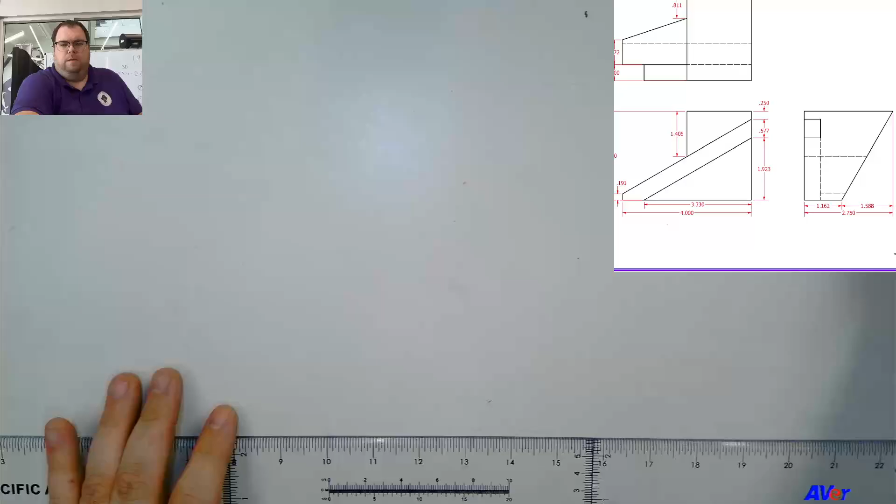All right, so we're gonna move on to the next unit here. Like I said last time we met, the next one is taking orthographic drawings, which you've been able to draw before, and figuring out how to turn them into isometric drawings. Now, we're going to change things up just a little bit when it comes to what Lab 26 is and what Lab 27 is. We're going to flip them around because 27 is much less complicated than 26.

Are we using tools? Can you say that again? Are we using tools for this one? Yeah.

That is not what I meant to do. Where's my mouse? There. Close. I need... oh my gosh, this having two cursors is driving me insane.

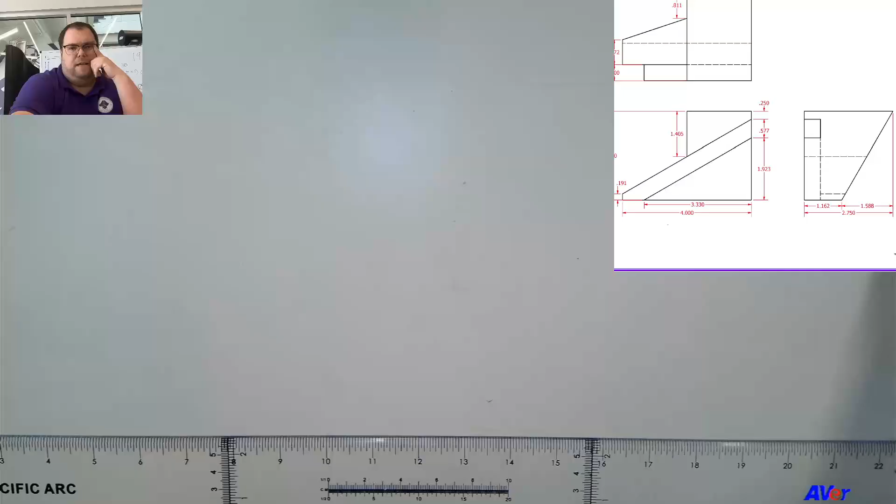Is it an easier process? Some people think it's easy, but here, let's just get into it and we'll see what you think. Basically, what's on the screen right now in the corner is 27. We're not going to do that one today. We'll look at that one probably tomorrow or the next time we meet.

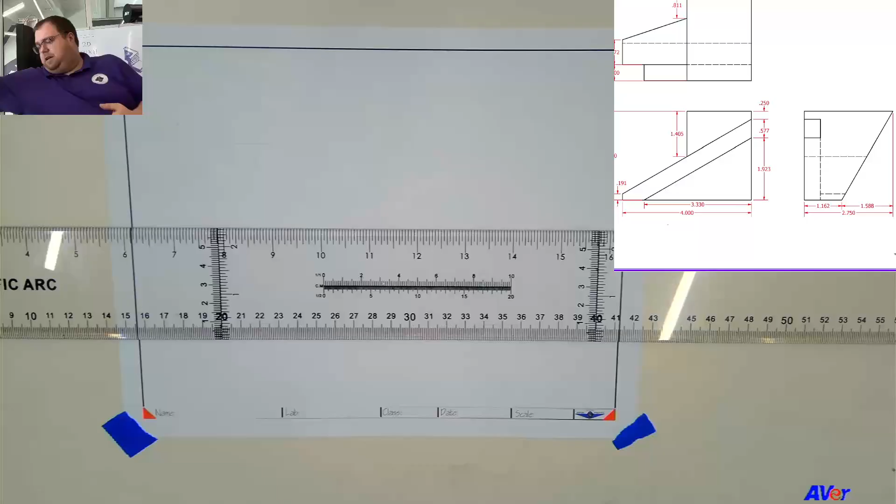It just has some weird hidden angles, and it doesn't lend itself to being put together from two-dimensional drawings super well. In fact, like I've told you, I'm in the process of re-editing this workbook as we go through the assignments this year. So I might even throw this one out or make it like a final test kind of thing, because it is fairly complicated to assemble because of the compounding angles. But let's just breeze past that for the time being.

And take a look at this one here. So this is, can I do that? Does that work? There we go. So this is the one that's supposed to be Lab 27. We're going to use it as Lab 26. So when it comes time to write the lab down, make sure you write 26 even though it says 27. Yes?

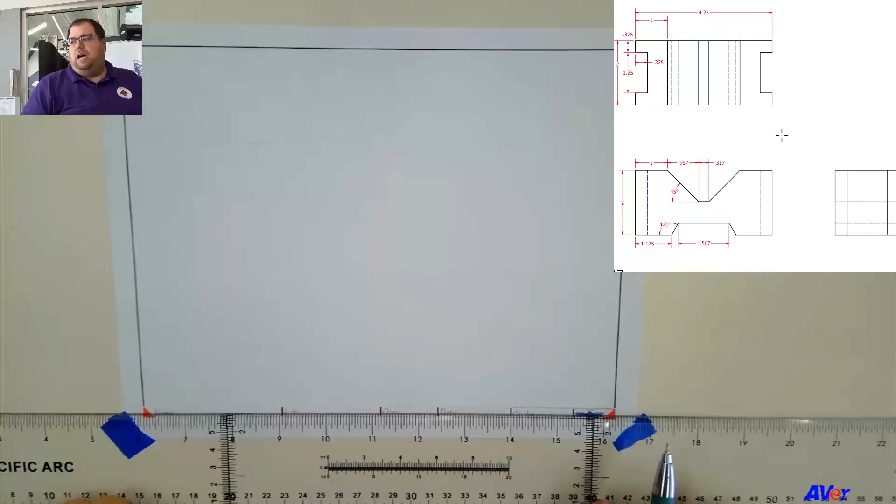So, alright. I'm working a little loosey-goosey today. I don't have a drafting board, so I'm just using the table. But we're going to start off by doing the three views for this, and then we'll put together its isometric view afterwards. This one is essentially a rectangle that has some pieces cut out of it. The shape itself is fairly similar to one that you've done before, but just different measurements. Now, one thing that is a little bit harder to grasp on this one, especially on the front view, is the dimensions are in decimals, so you have to do a little bit of converting.

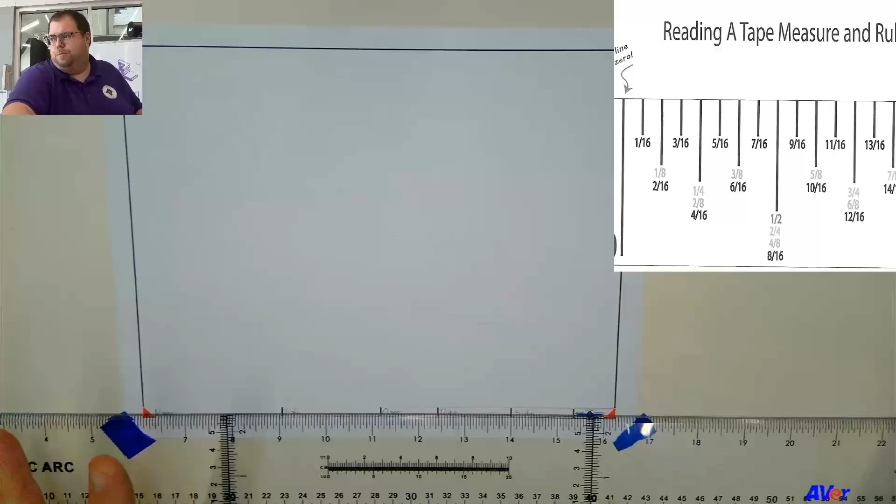However, in the back of your workbook, there is a conversion chart back here that'll basically give you the decimals as close fractions. There it is, the one in color. And if it doesn't have an exact match for those decimals, then whatever is closest is fully acceptable for this.

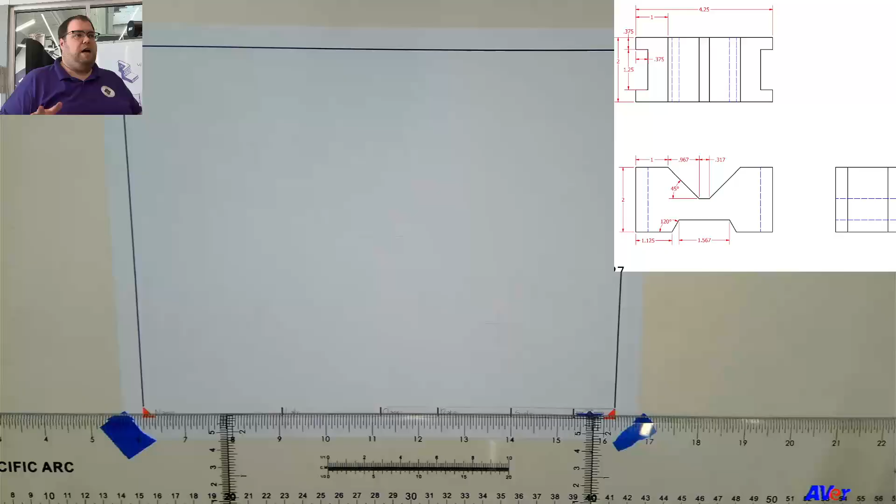What is the question? No, you're still using the same thing there. The thing is, our assignment is all in decimals today, so you have to do the conversion. So if you got the printed copy of your book, you can flip to that and keep it on the screen or however you want to check this out. There's also, I think, a link to that picture in Canvas somewhere.

But taking a look at this, first thing that we're going to notice is that our shape is 4 1/4 inches long, which means that we're going to put 2 1/8 at our center mark on here. Do some focusing here. And we'll pull this in a little ways. Let's see if we'll make that a little more centered. There we go. Boy, that's still not super sharp.

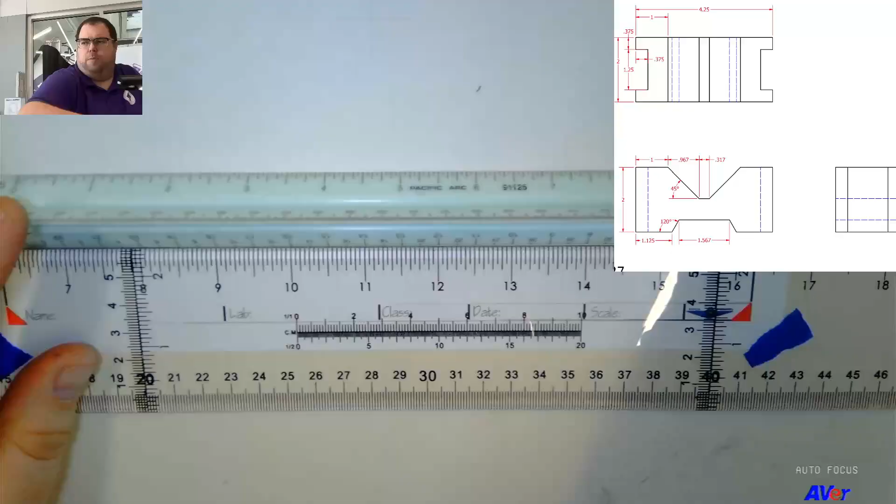There we go. Alright, so I have my 2 1/8 mark on the horizontal center, and the scale is on the vertical. I'm sorry, flip those around. 2 1/8 is on the vertical center, and the line is sitting on the horizontal. So I'm going to make a mark at 4 and a quarter, and a mark at 0. So those 2 dots there.

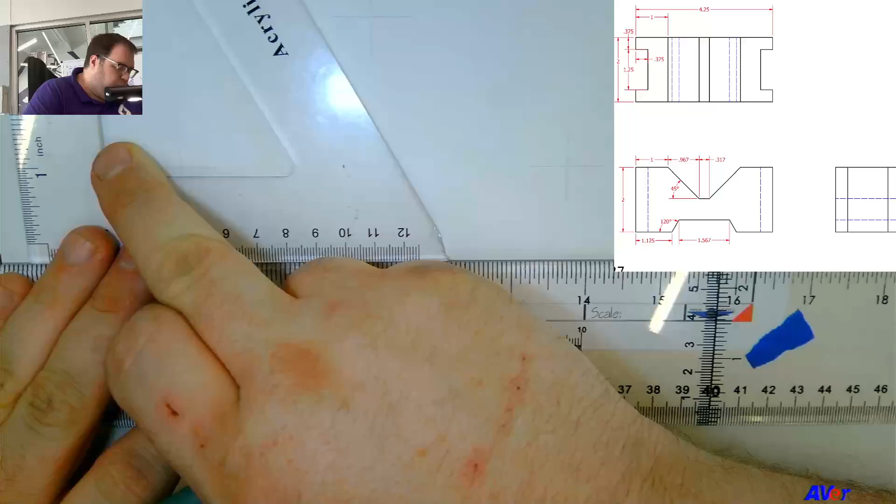Our shape is 2 inches tall. So I'm going to grab my triangle, set the 1 inch mark on my vertical center, and then draw a 2 inch line at each of my dots. So overall, this one should be fairly similar to what we've done before.

At the bottom, the line across from each side is 1.125, or 1 1/8. 1 1/8. 1.125. So that's in from the right, and I'm going to do the same thing in from the left. Yes. This? 2 inches. How long is it? 2 inches tall, okay. 1 1/8 wide. Same thing on both sides. Appreciate it.

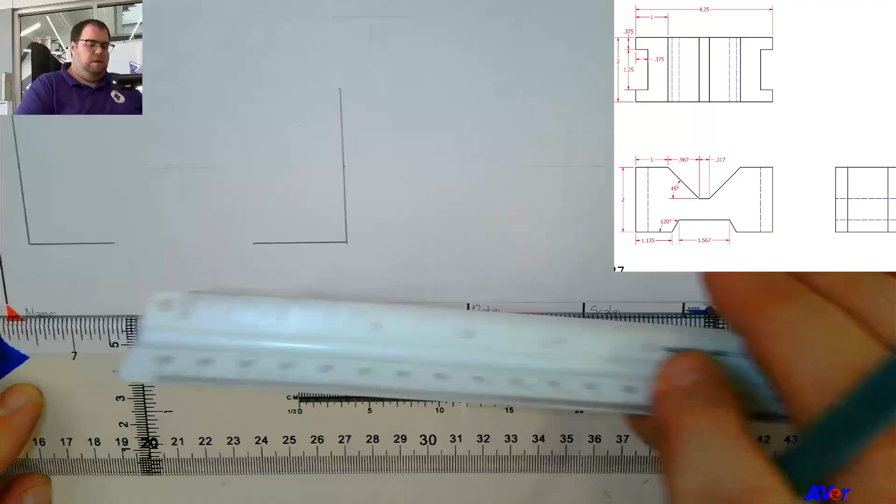Man, that was a bad idea. Why did I do that?

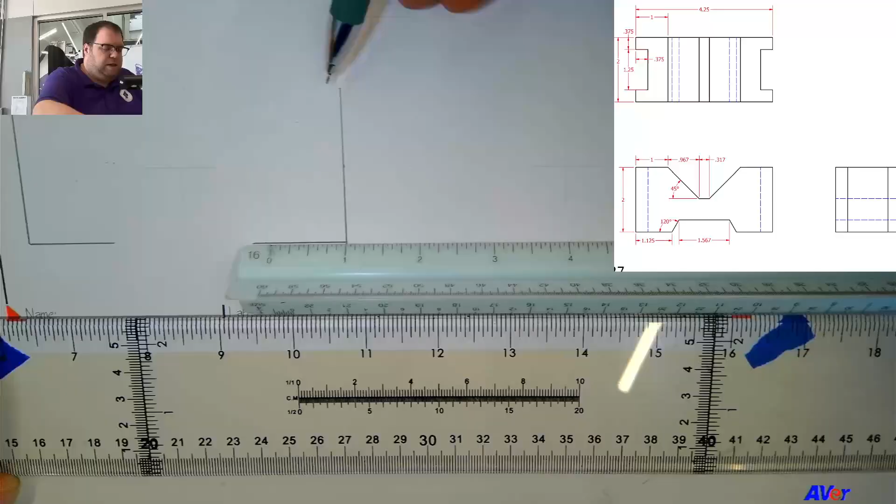Oh, nothing crazy other than I never fixed this from being a CAD drawing. I'll tell you what I'm talking about in a second. Up here at the top from each side is 1 inch in only. So there, and 1 inch there.

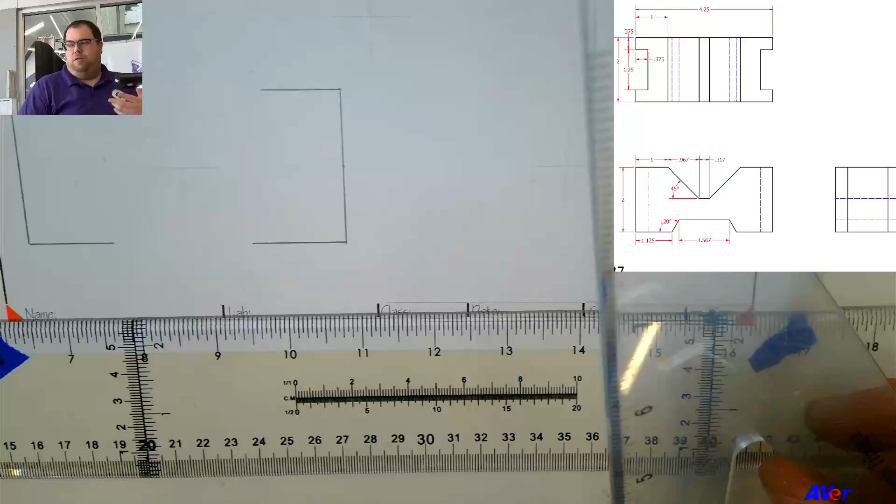So the thing that, and I'm pretty sure this is right, so if it's not right, we're going to go with it anyway. This cutout down here at the bottom, I gave you the width between the angles, but I didn't tell you how tall it was. I also gave you the angle. So it is possible to figure this out. It's super easy to figure this out if you're doing this in CAD. But since we're doing this manually, I should really have given you another measurement here, and that's what I'm going to do now.

So what I want you to do is, I have lined up the 1 inch mark on my measurement with the bottom line. I'm just going to slide over so that I'm in the center. And then I'm going to come up 3/8 of an inch and make a dot. So that's going to be the spot where that horizontal line is. I don't know how long it's going to be, but I do know it's going to at least be in between the opening down here at the bottom. So I have to do a little bit of scaffolding here.

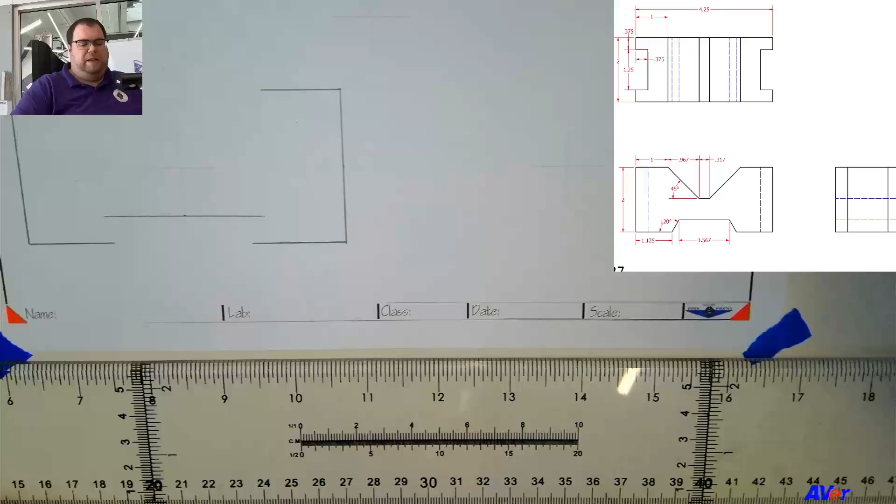How do you suppose we could use that angle? It says that it's 120 degrees, and it's 120 degrees off of the flat line here. If the flat line straight across is 180, and going straight up is 90, then 120 is going to be an additional 30 degrees. Or the 30 degree angle on your 30, 60, 90 triangle.

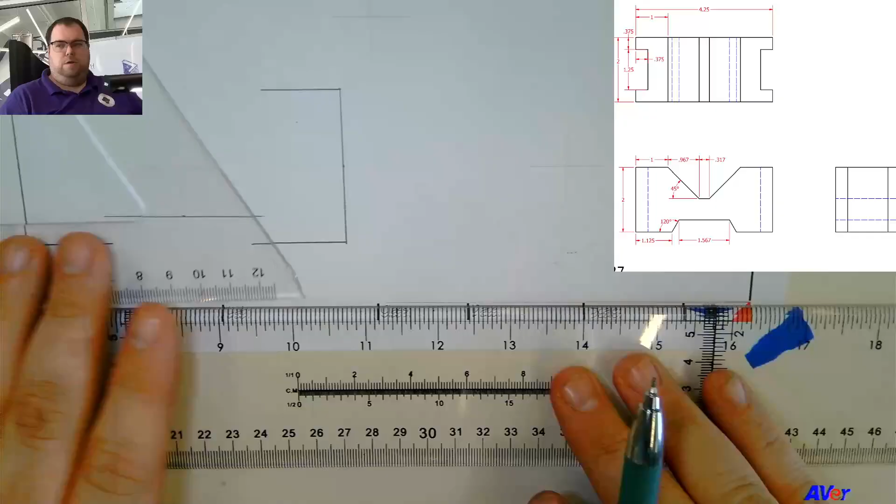So basically, once you have the line drawn there, 3/8 of an inch up from the bottom, we just need to set your 30, 60, 90 triangle so that the short leg is against your T-square, and then you just have to line it up with the end of the line on both sides. And then anything that's outside of that angle is something that we'll erase.

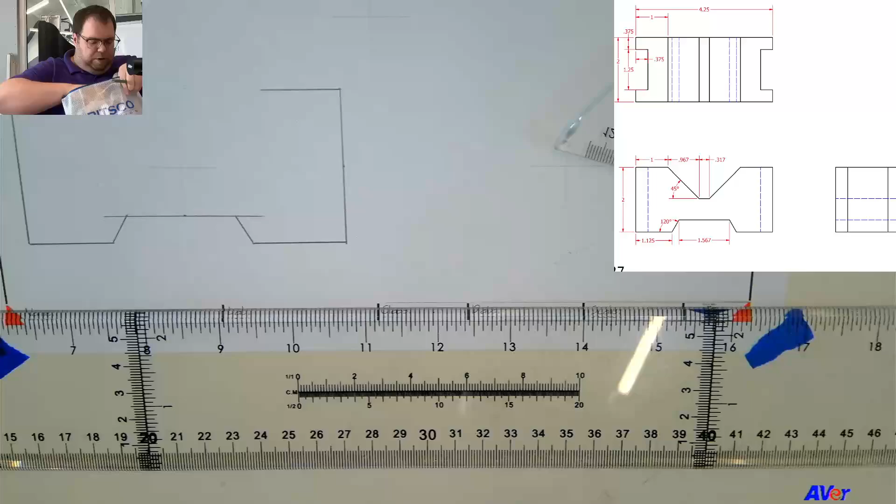The top, basically the same thing, except it is at 45 degrees, not 30, 60, 90. So I'm going to grab my 45-degree triangle, if it still exists. There it is. This one says 0.967 as the measurement. So we come down to our chart, because I don't have that one memorized. I think it's 15/16, but we'll double check. 0.96, let's see here, looks like 0.968 is 31/32. So we're just going to go with 15/16. Okay?

So you can't see what I'm pointing at here because it's off the screen. But if you look at your own chart, you'll see that our options are 0.9375, and then next to it at a 32nd of an inch is 0.96875. When we're doing manual drafting, I've said this a few times before, we aren't going to be as precise as we would be on a computer. So we're just going to go with the closest and the easiest for you to read and find. So that means that we're going to go with 15/16.

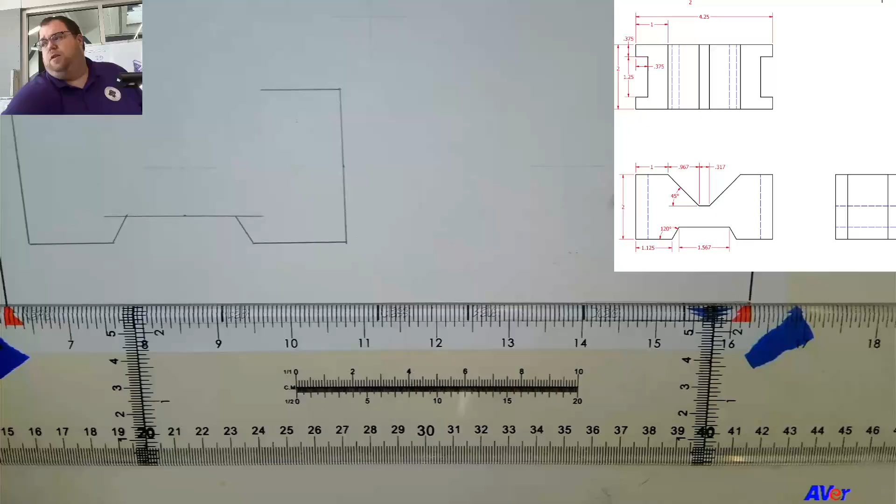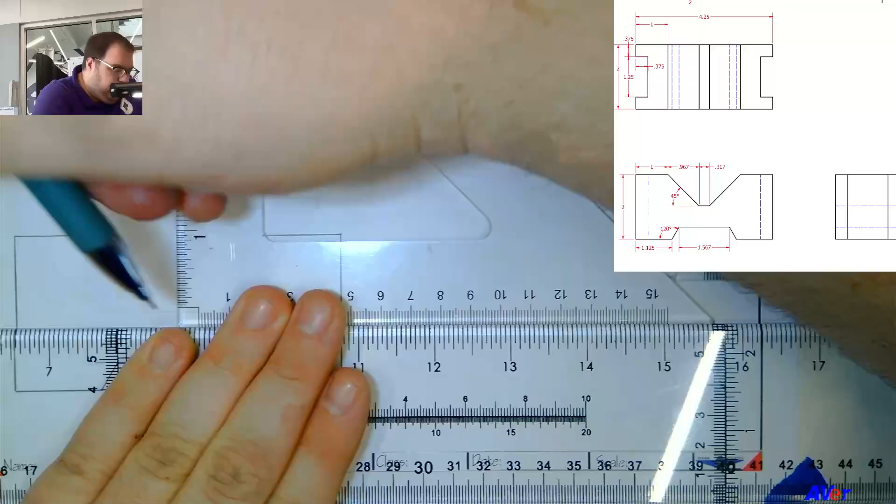I'm going to set up my triangle, so it's like this. And let's see, what's the best way to do this? It's a 45-degree angle. I'm going to come down and set. There you go. So I've put 15/16 aligned with the top line there. And I'm just going to slide over here to the center. I'm going to make a mark down here at 0, and then just very simply make a little line through that mark right there.

Set up my 45-degree triangle. We know it's 45 degrees because it tells us it's 45 degrees. No figuring out involved. Do that. Do that. And that's the front view, minus a bit of hidden line. We'll do that real quick.

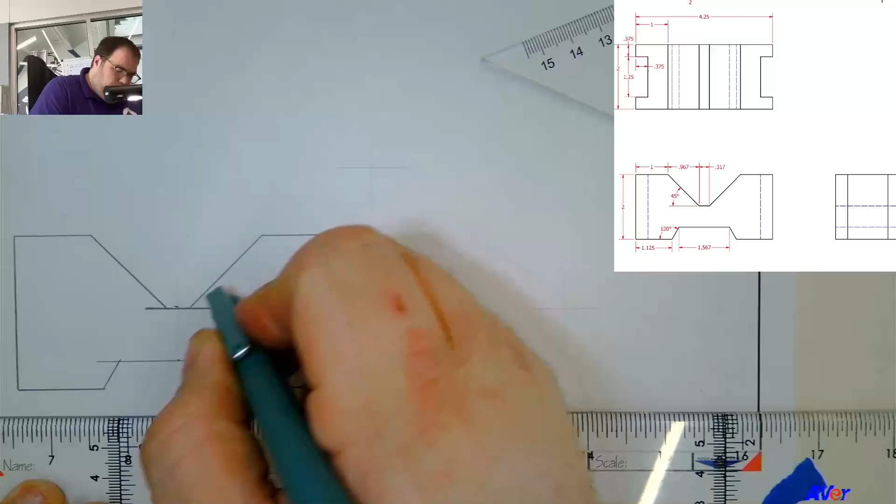All right, so we're going to pivot just a little bit. I'm going to put the hidden lines in real quick, and then because we've just drawn this shape, we're going to go ahead and draw that part of it in isometric here in just a second. The reason for that, because you're familiar with the shape, it's fresh in your mind, and all we have to do is draw it up here where all of our straight lines are 30 degrees. The angles will be a little tricky, but that's nothing we haven't done before.

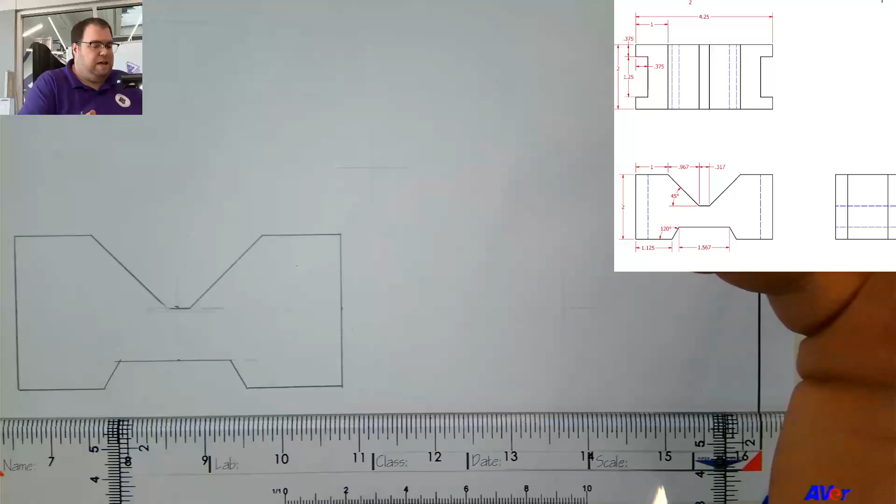The only other difference for this one is that it is quite a bit larger than the last few that we've done. So we're going to come over a little bit further in our isometric corner. Whoa.

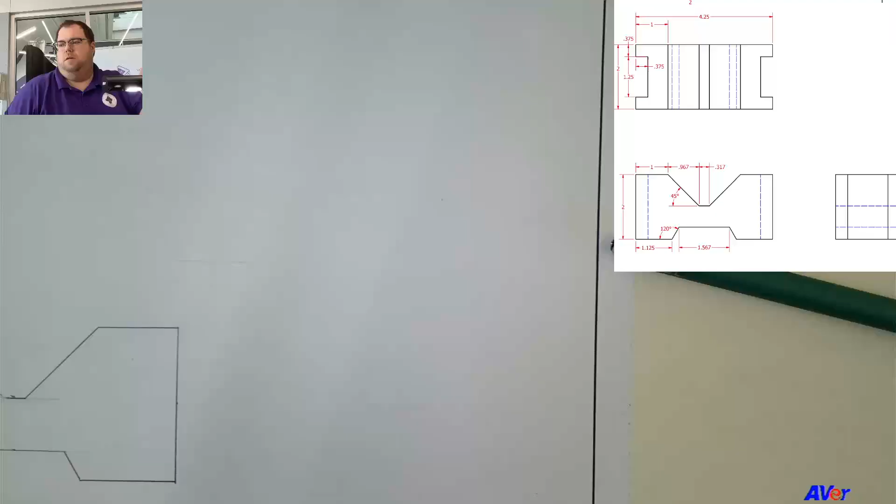There we go. A little bit further in our isometric corner than we did the last few drawings. So here, we're going to do this. I'm going to put my scale here, and I'm going to come about a third of the way across and put my dot. Here, I can double check if that's going to be enough by just setting my triangle here. And I can see that I can easily get 2 inches this way without running off the paper, which is something that we'll look at here in just a little bit.

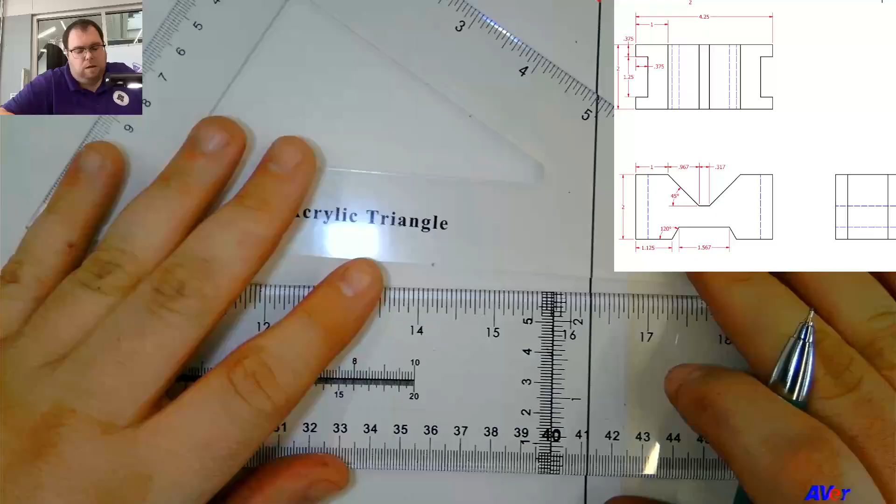Oh, is it 2 inches by 2 inches? So if I do this, I'll get to there. Maybe this isn't going to fit. Yeah, this isn't going to fit, is it? Yeah, it's really not going to fit. Do I want to make this our first scaling assignment too? We are going to accept that this is going to run off the paper, and we're going to be okay with that. Okay? So don't draw on the board or the table, but just know that when we do this part of it is going to get clipped, and we're fine with that.

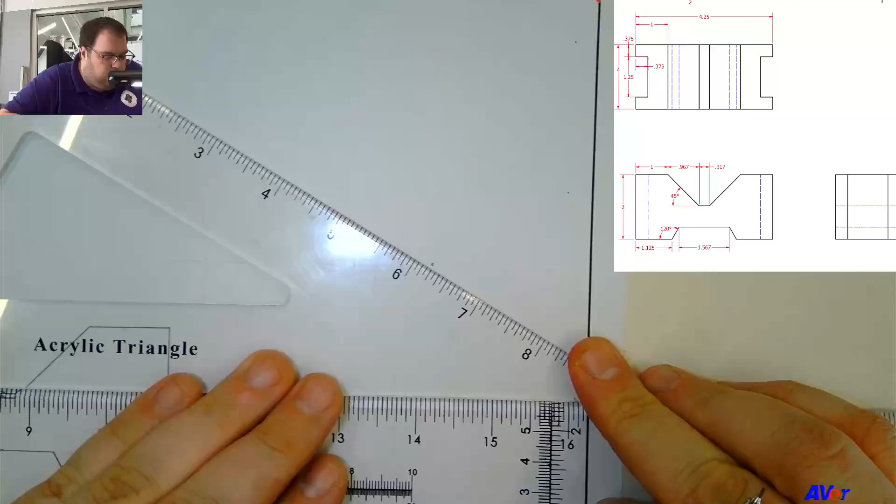Okay. So from our little dot here, I'm going to go ahead and draw a 4 1/4 inch line. Ooh, is this going to run into the front view too? Did I do this on bigger paper last time? Okay, here. Let's switch tracks again. We'll go ahead and finish the 3 views, and then we're going to flip the paper over and do the isometric on the backside. So, it's cool. We'll just turn in 2 pictures for the assignment. I think I did this on size B paper previously, which I don't have any of right now.

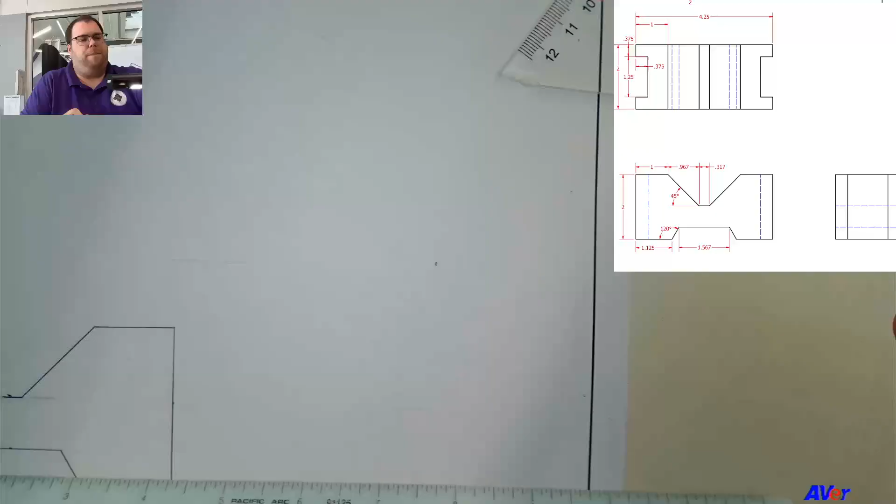Because if you didn't know that, school's in a paper shortage right now. Oh, I thought that was an April Fool's thing. I wish. Teachers have been running all over the building trying to print things because all of the copiers are out of paper.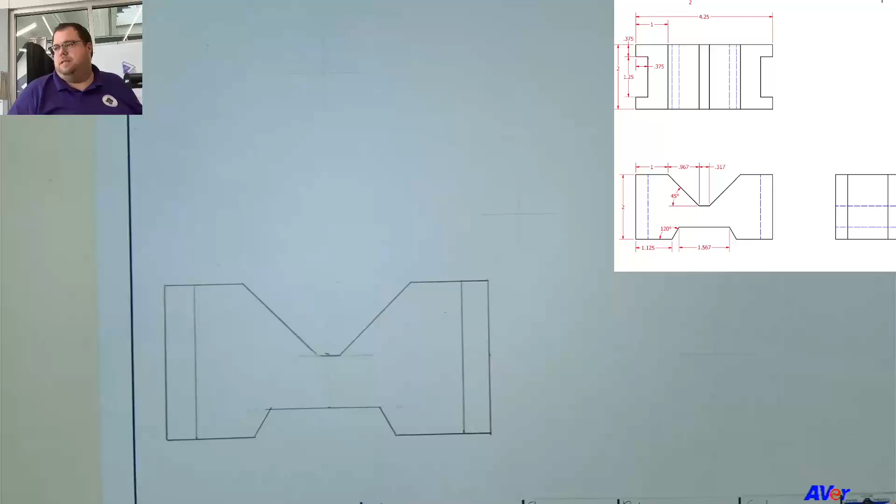Okay. We got to put in that hidden line, which is 3/8 of an inch from the edge. So I'm measuring 1 2 3/8 on this side, and 1 2 3/8 on this side. And then we're just going to catch top to bottom. And then we'll make it hidden lines later. Top view and the right side view are basically just rectangles. So I'm going to do that first. The right side is a 2 inch by 2 inch cube or square. You good? Yeah.

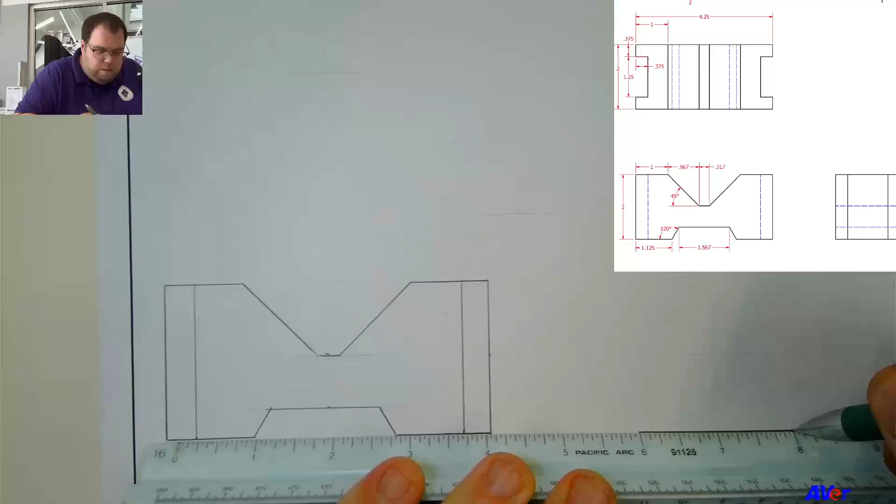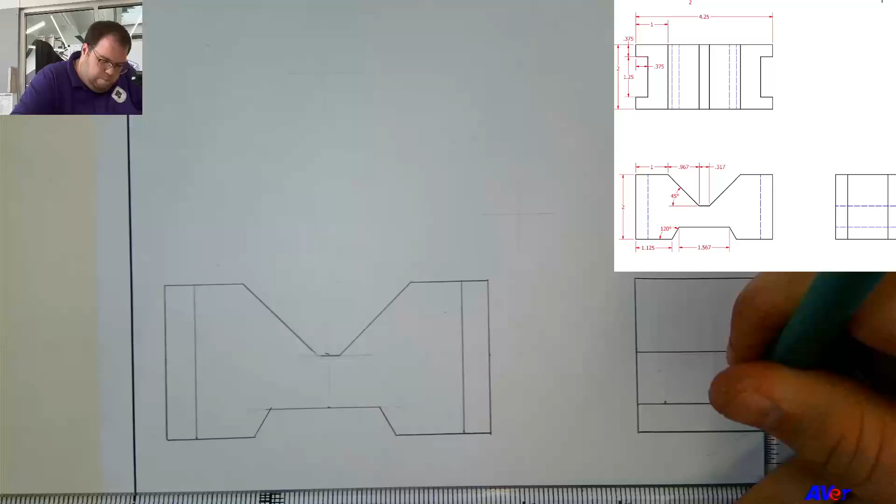So 2 inches. Go ahead and do the height. 2 inches. Cover the top. The hidden lines on the right side view come from this flat at the bottom of our 45-degree angles and the top of the bottom angles. And then the lines on the side are 3/8 of an inch in from the edges. 1 2 3/8 right there. Again, these are going to be hidden lines that you'll get rid of, or we'll turn into hidden lines later.

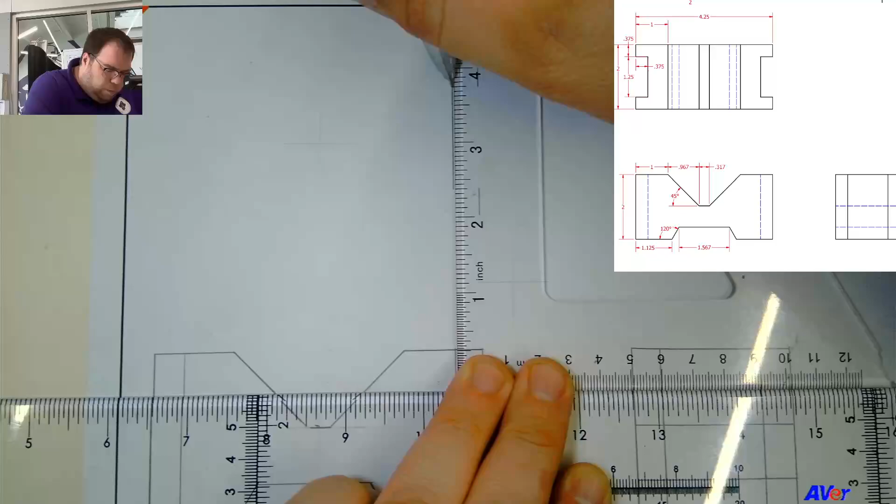Now for the top. There we go. So we've got 1 2 3/8 in. 1 2 3/8 in. So I could just draw the full lines and then erase them later, but I don't need to, so I don't want to. Basically, I did the 3/8 inch lines, top bottom. Then I moved over 3/8 and drew the connecting little bit there. I'll do the same thing on the other side in just a second. Oh, oops. There. 4 to 2. Okay, and then I'll figure out those hidden.

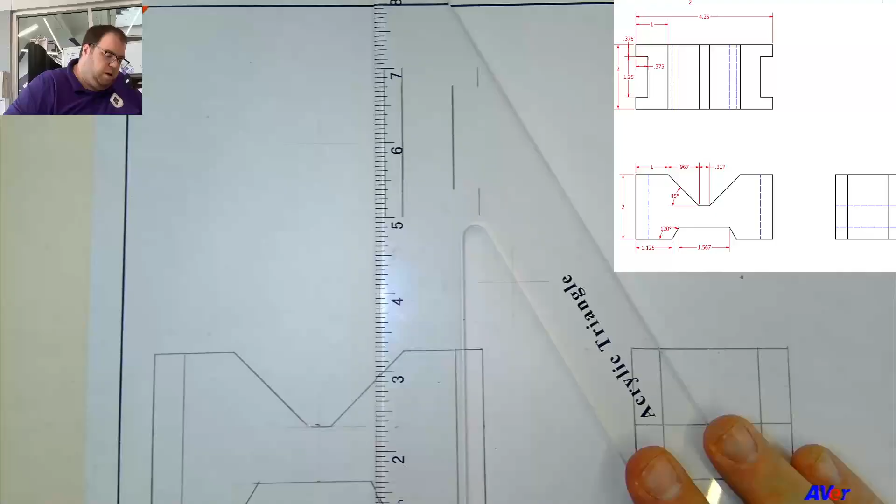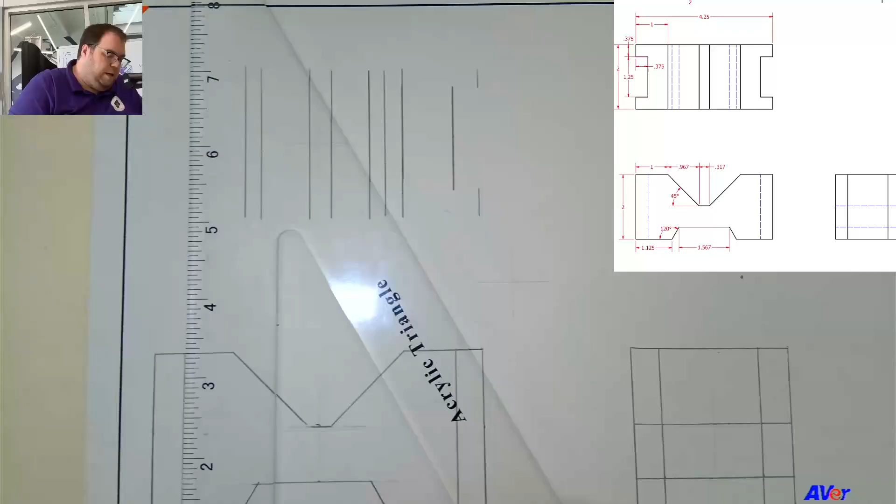Here, I'm gonna do this. What am I doing? Oh, pulling the tape up. Set 6 up on there now. So hidden line from the first part of the bottom angle, hidden line from the second part of the bottom angle, solid line from the right hand side of the top angle. Now solid line from the left hand side of the top. Again, come down for the inside angle, and then the outside angle. Basically, we're drawing lines that correspond to all of the corners here. So anytime that there is a corner down on the front view, it has a corresponding line on the top view.

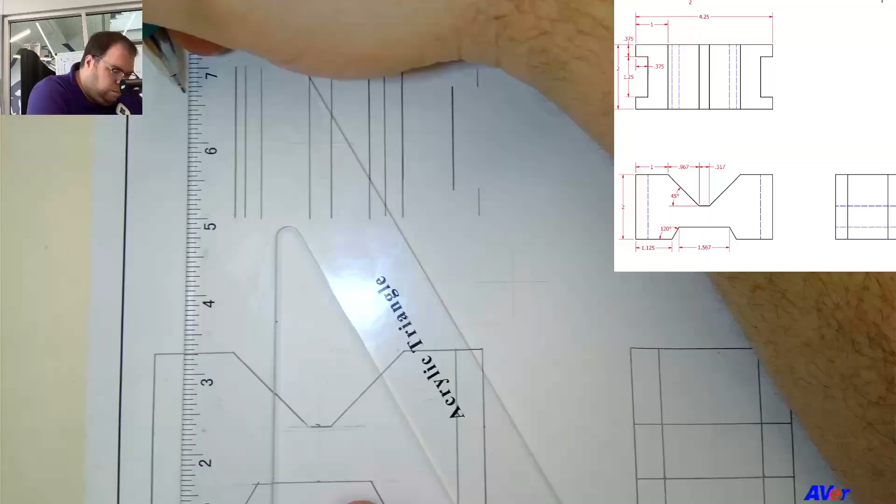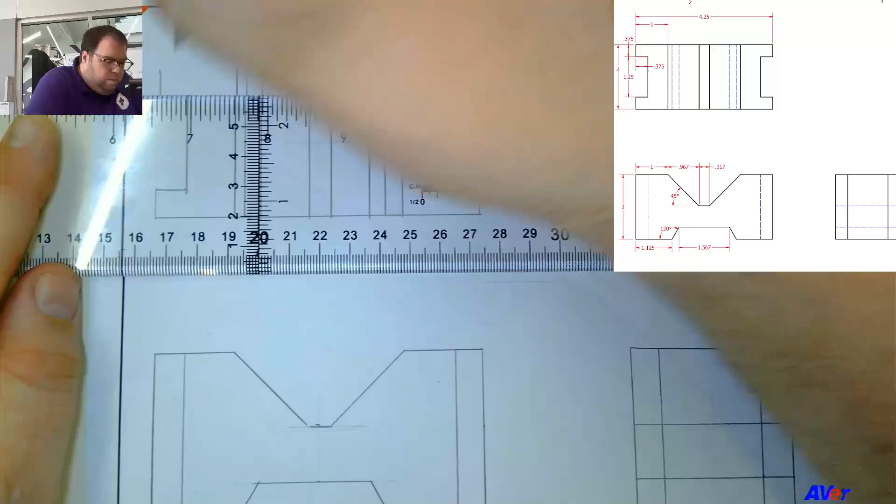Let my T-square shift. Yeah. Cross lines are literally just the top and the bottom. And then that little bit right there between the first two lines on each side. I got off place somewhere. I think I mismeasured. I did, in fact, mismeasure. There we go. Alright, that just leaves taking care of the hidden lines on this side. And then we'll move on to the isometric.

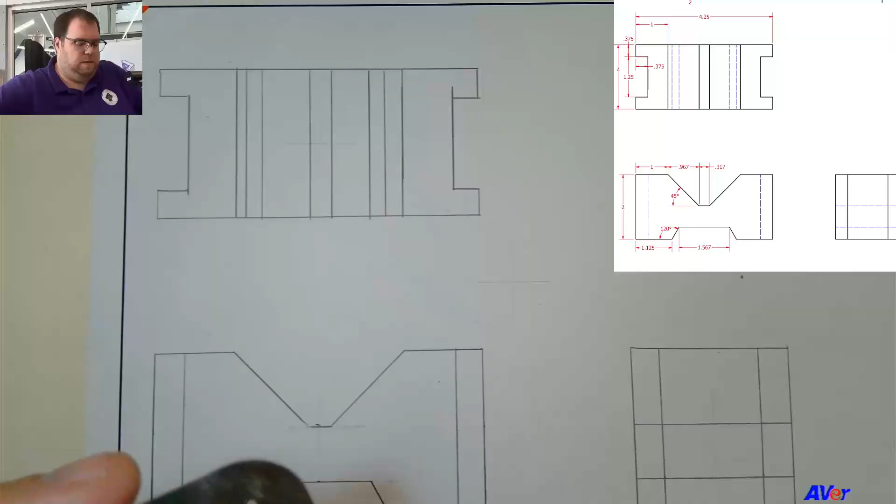Like, once you get the front face done, the rest of it is incredibly easy for the isometric side of things. And I'll show you what I mean. Trying to see what. Okay, so that's hidden. And that is hidden. Let's see. That one is hidden.

We're not done yet, right? No, we're going to do one more thing, and we're going to do the isometric on the other side. Is that a big thing we're doing? No, just flip the paper you got over.

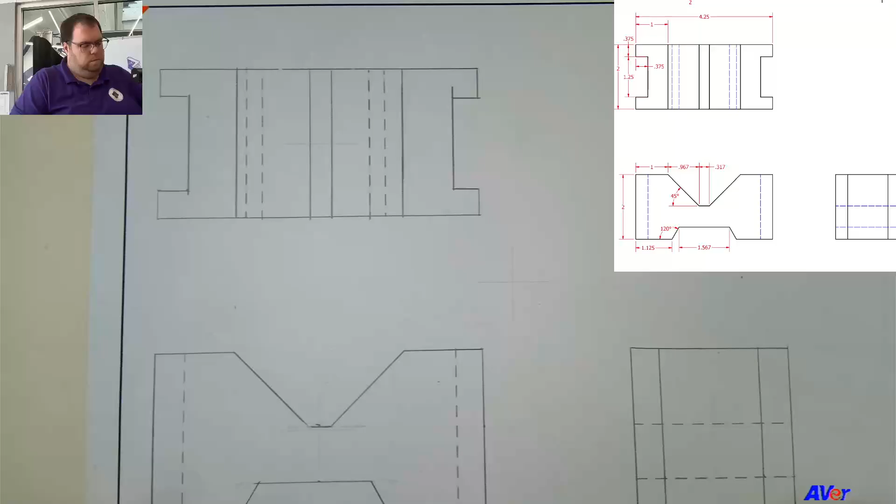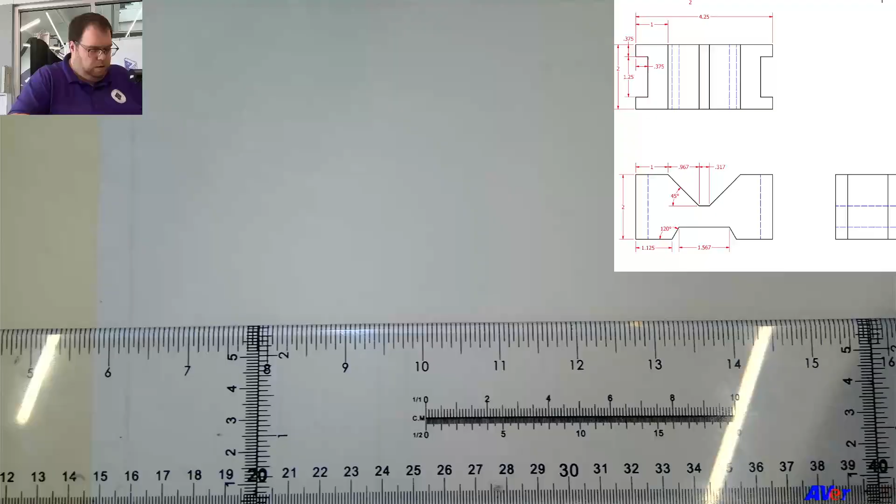Alright, so once we have the 3 views done, we're going to flip it over. Since this one doesn't have a title block, just get it fairly straight. You don't have to spend a lot of time getting it aligned right. I'm just going to quickly drop this here and eyeball it.

All right. Wrong shop again. I hear. She'll either figure out if she's in the wrong place or she'll figure out she's calling the wrong person.

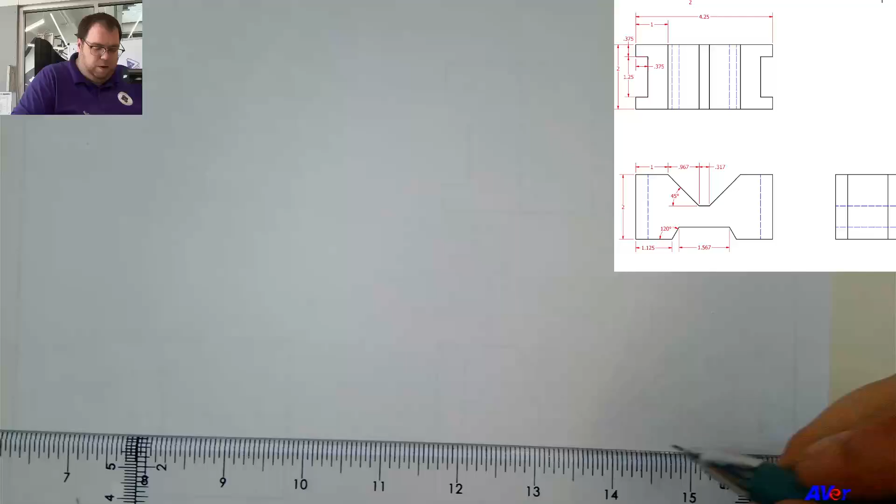Okay, in order to do the isometric view, I can see my front view through the back side. So I'm just going to choose the center of it, which is right there. So somewhere in this neighborhood, roughly, on your paper, like just lower right quadrant-ish. So like we tried to do earlier, we're going to do our front view first.

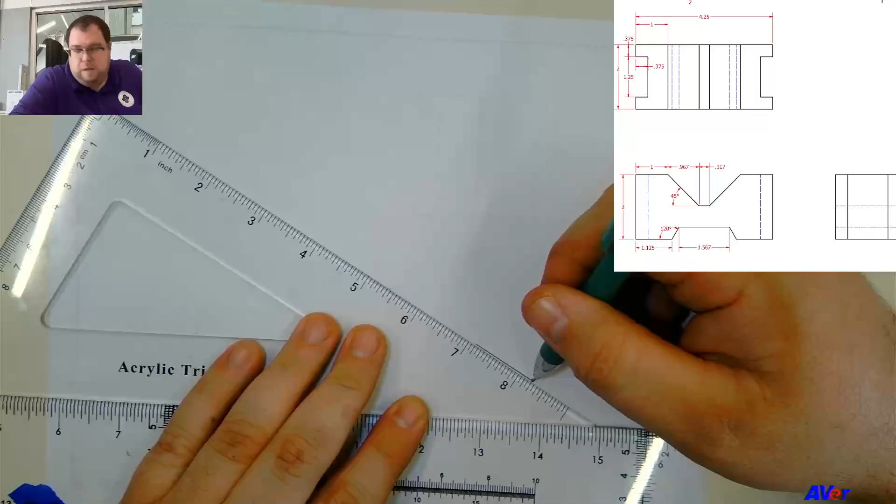So it is 4 1/4 inches long across the front. But if you remember, the bottom lines are 1 1/8 long. So I'm going to start off by doing that. I put 8. Oops. That would be easier. There we go. Put 8 1/4 down here. And then I did up here to 7 1/8. And 7 1/8 is the length of that line.

If 8 1/4 is my starting point, then 4 1/4 inches away from that is going to be 4. So I'm going to come down 1 1/8 from there.

Let's see, who is... What? 1 1/8. Hey, Kit. You are called out.

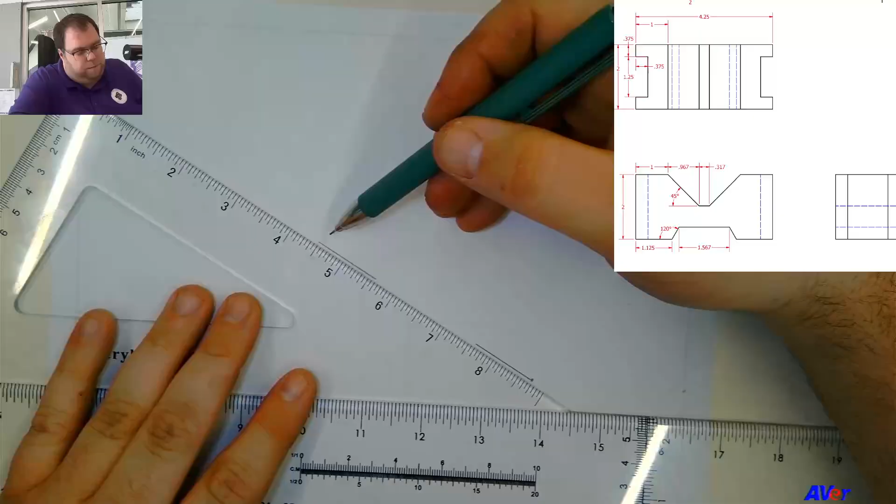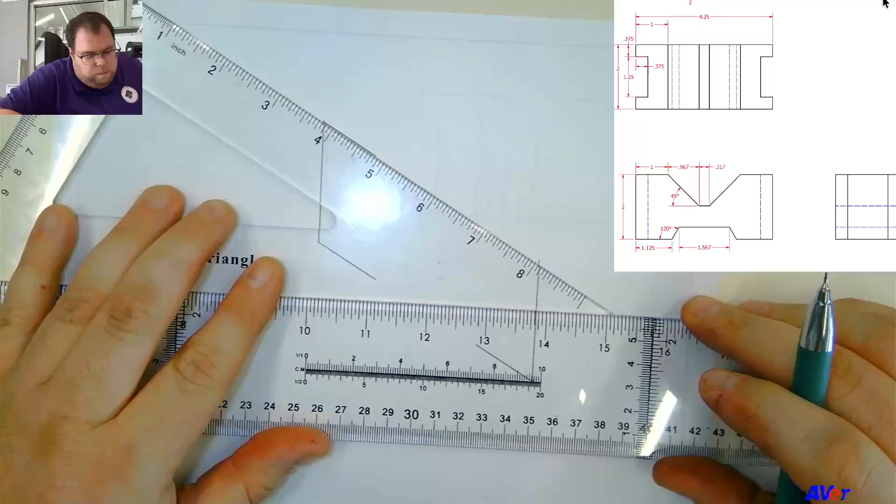Alright, so that makes the entire length from the beginning of the line up here to the bottom down here should be 4 1/4 inches. On each side, I'm going to go straight up 2 inches. So there, and then also up here. And then I'll come 1 inch on each side. Or not down, but towards the middle, 1 inch on each side. Okay.

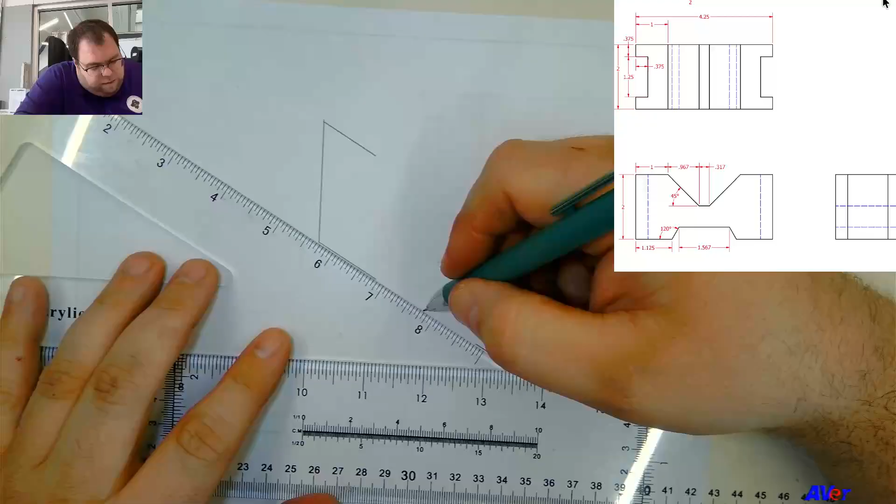To get that height for the angle here, oh, that's going to be annoying, isn't it? I hadn't thought of that. Figure it out in just a second. This is going to be the best way to do that. Okay. To get that 1 1/8 for the line there, I'm just going to draw a dot roughly in the middle between those two, and use that as a reference to measure straight up 3/8 of an inch. 1, 2, 3. Put another dot.

And then just draw a line there. So I put a spot in the middle between these two lines and measured straight up 3/8 of an inch. And then just drew a line that I knew was going to be way too big, as long as it was covering the space between the gap. We'll erase the rest later.

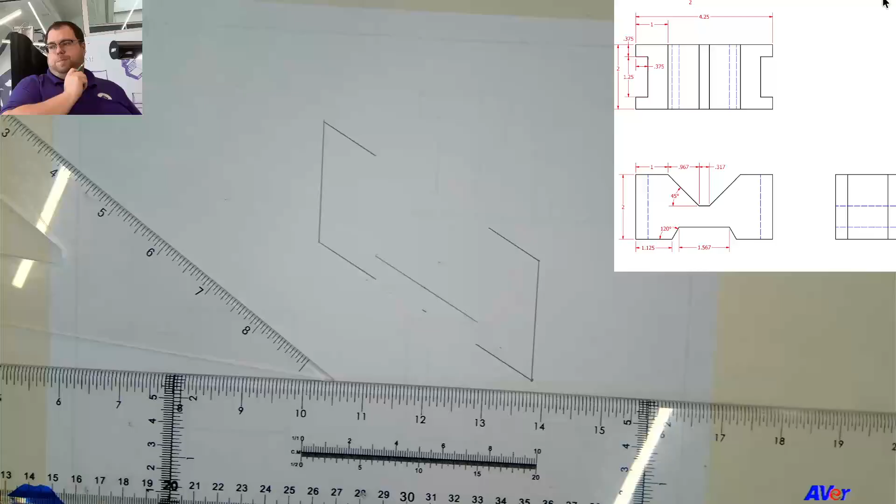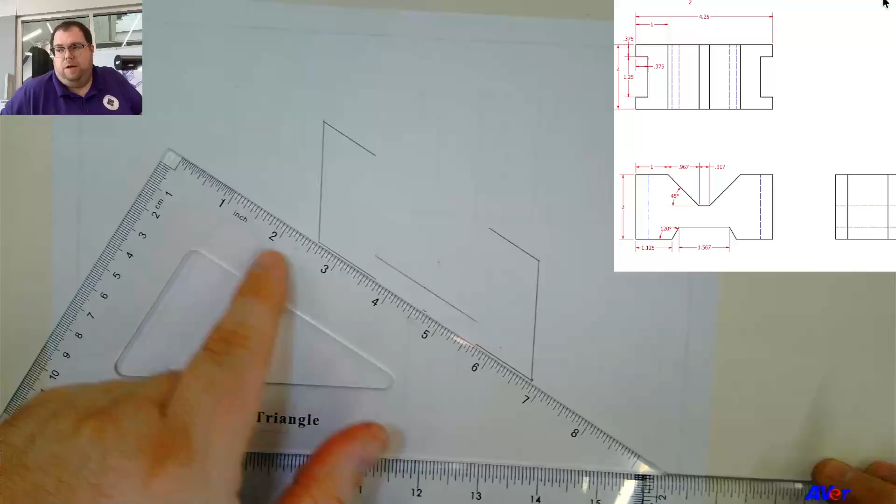Let's see here. We have a leg that's 3/8. Is that going to be 3/16, I think is how that works? Yeah. Alright, so what I'm going to do is from the end of this line on each side, I'm going to measure 3/16 of an inch. 16ths, unless you're within the first inch on here, is every tick mark on the ruler. So 1, 2, 3.

Oh, 3/16, yeah. So that should be a little more. 1, 2, 3. Yep. And 1, 2. Oh. 1, 2, 3. Yep, no, I did that right. Okay. Blue ribbon. Okay.

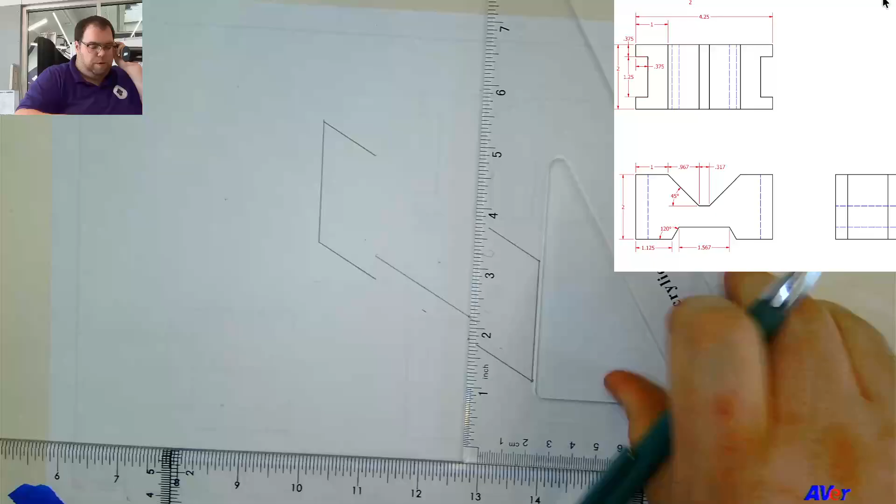All right. So once you've measured that dot 3/16 of an inch over, you're gonna come up and put a dot on the line up here. So we're going to do quite a bit of scaffolding here. So we came from this point here and went 3/16 of an inch, and then went straight up and put a mark. And then we're going to connect that mark down to this. So from the mark, straight up from the 3/16, we're going to come back and do that.

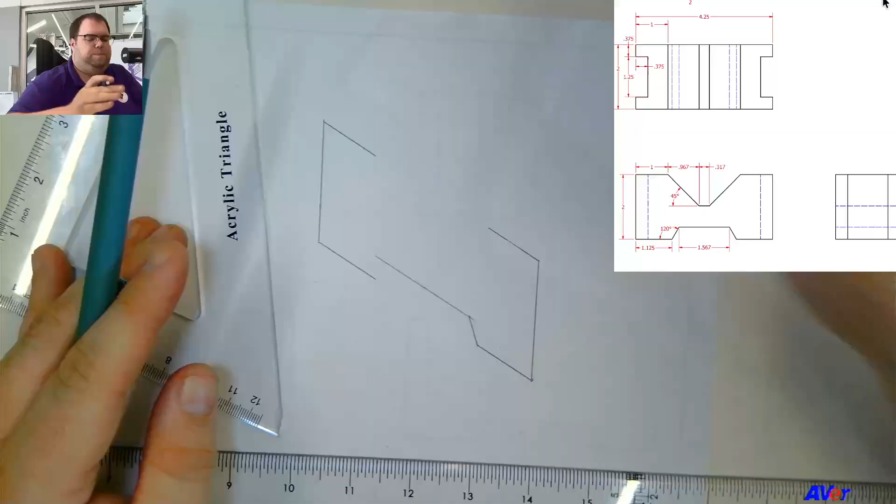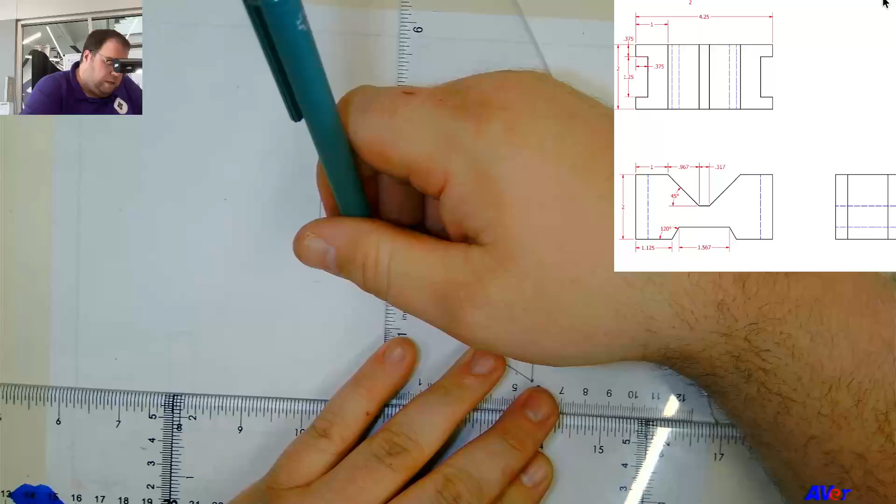Okay, what is happening inside this thing? Get rid of some of this extra stuff. There we go. We're going to do the same thing on the other side. So we're going to measure 3/16 of an inch down and to the right from the end of this line. So 1, 2, 3. Put a dot. Don't have to measure anything. We just line up with our dot and transfer it up to the line up top. And then connect the dot up top with the end of our line.

Is this like coming apart? Oh, that's what happened. There we go. Okay.

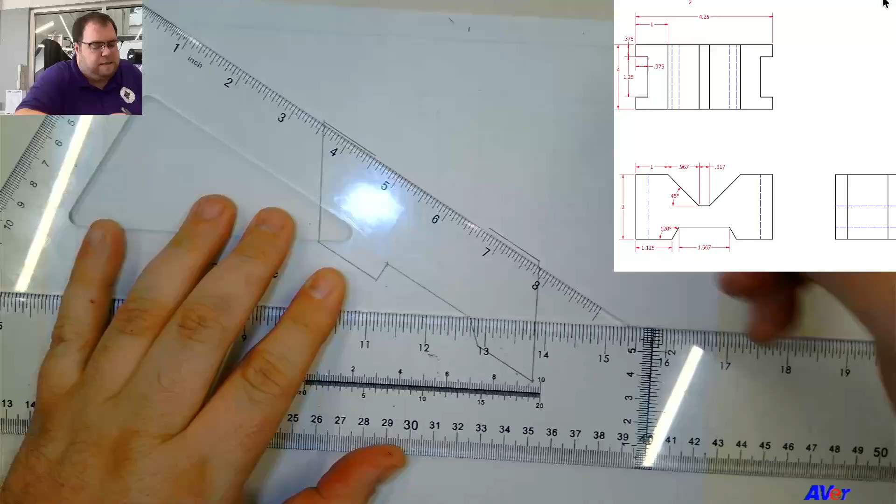We're going to use the exact same steps from the top, except the numbers are going to be different. So since it's a 45-degree angle, both of our measurements are going to be the same. So we did 3/16, we did 3/16. So I'm going to come in and put a mark 15/16 from the end of this line. While I'm at it, since I'm already here, I'll do the same from the other side. 15, so it's there, right there. So I have my two dots.

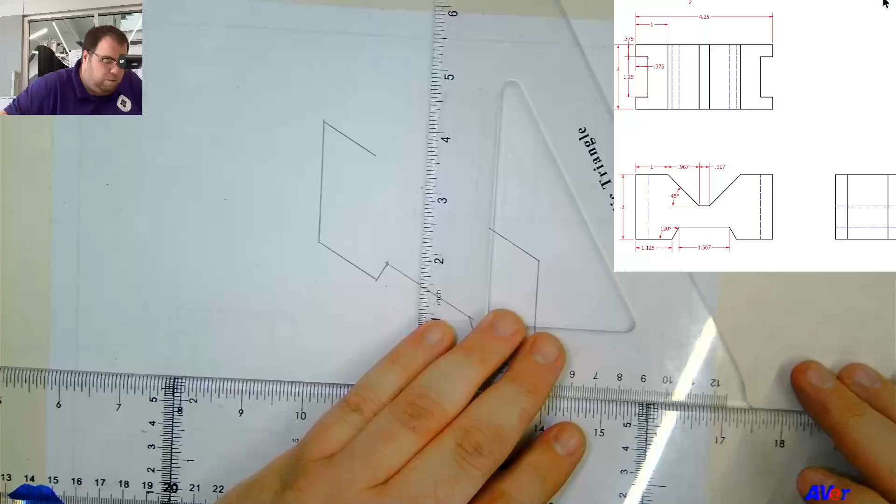Spin the triangle, and we're going to do the same thing going down, 15/16 of an inch. So I put my dot at 2 15/16, and I'm drawing a dot at 2 inches. Do the same thing over here. Okay. So now this end is going to connect to that dot. This end is going to connect to this dot. And those two dots are going to connect to each other. That's front view.

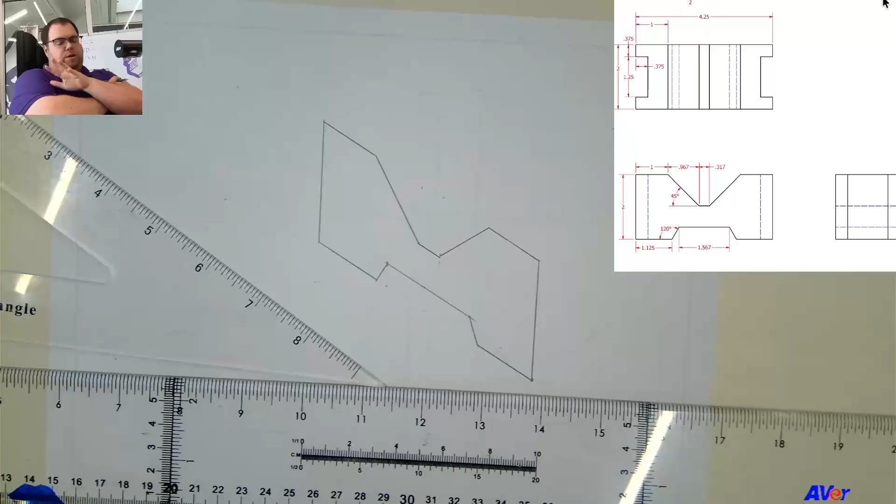Alright. Our shape is 2 inches deep, the same as it is 2 inches tall. We've already taken care of the part that says that it's 2 inches tall by finishing the front view. What we're going to do now is transfer most of the lines straight back 2 inches. To do that, we're going to take our triangle, and I'm going to start with the 4 full lines first. So this one, this one, this one, and this one.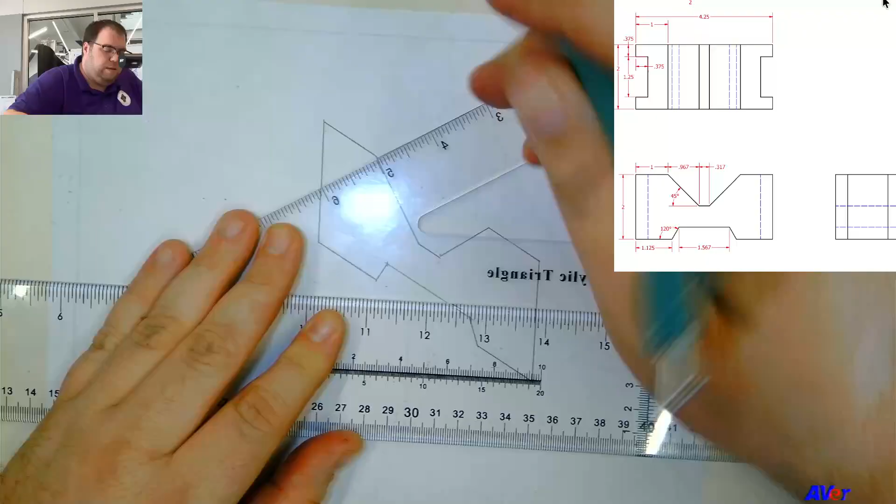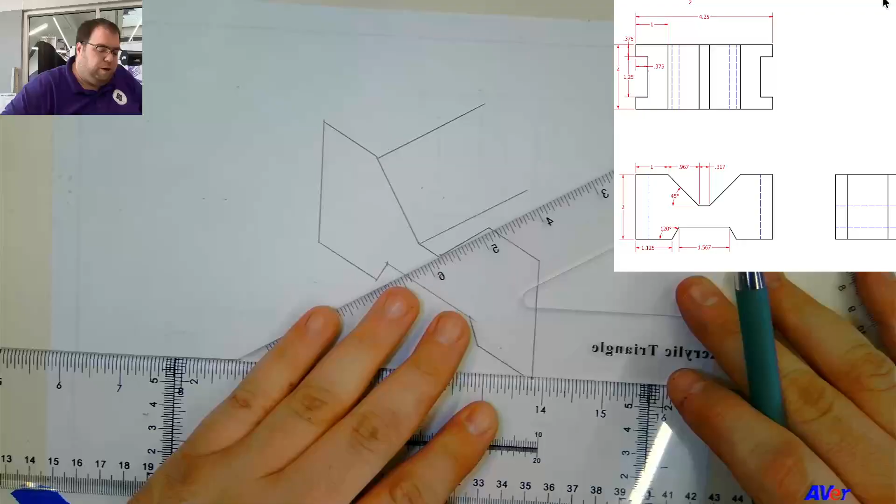So basically, I need to line up a whole number with a corner, and then go back 2 inches. So whole number with a corner, going back 2 inches. This one, I'm not even going to need to draw a line because it gets hidden underneath this part. So there's really only 3 lines that we have that are complete. Okay. Is that? Not quite. Close though.

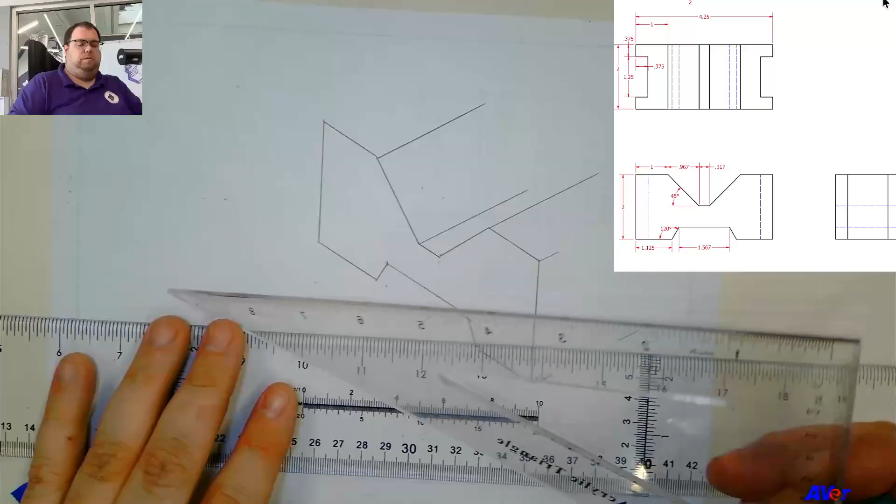These 3 ones are going to start off by being 3/8 of an inch long. So I'm going to start here at the bottom. I'm going to go 1, 2, 3/8 there. I put the point on a whole number, so I can come up here to 2 inches away from it and finish the other side. 1, 2, 3. I'm going to slide up and do the same thing on this line here. So 1, 2, 3. 1, 2, 3. And I'm going to connect those top to bottom.

Oh my gosh, this tape is driving me insane.

So just top to bottom, no measuring, nothing fancy. And then this bit here. And then this one over here.

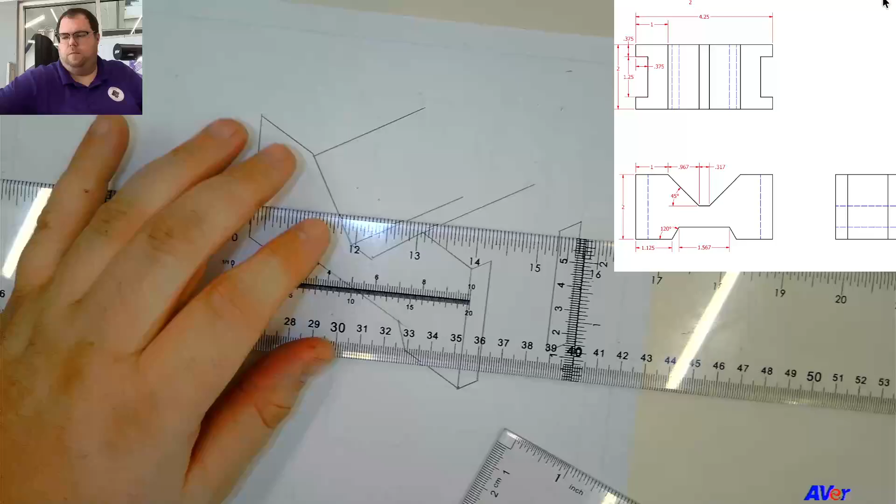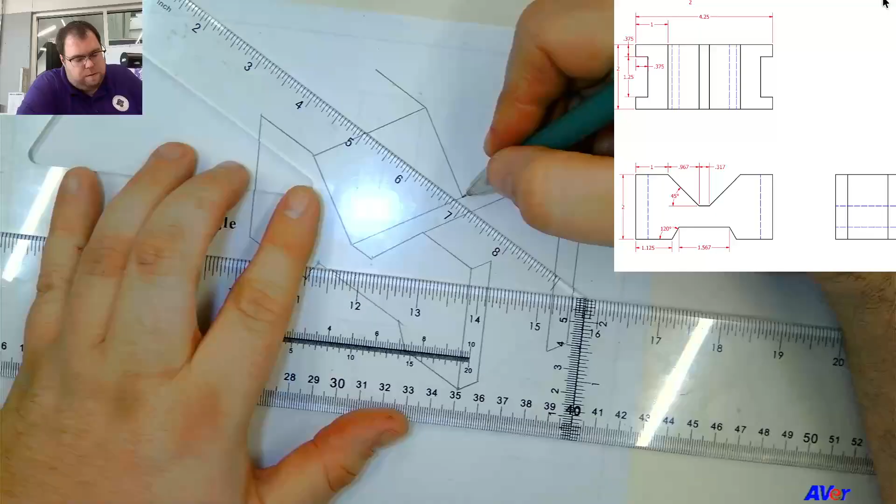This stuff won't roll as easy. Okay. Let's see, I'm going to connect this one here to start with. Now that I have this one over here, I can go 1 inch there as well. I can also do this. And this. Ooh, don't want to forget this one.

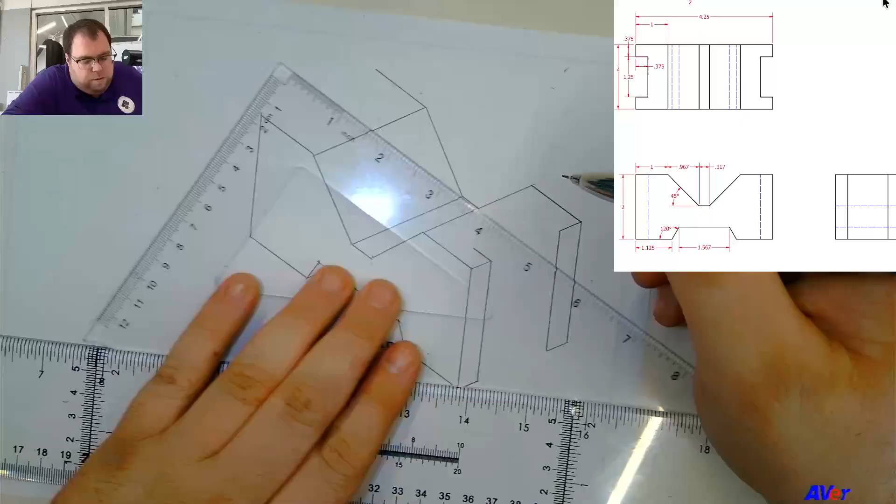Alright, so now we just have to finish both of those top views and then carry some lines. So we're going to come in 3/8 of an inch, 3/8 of an inch and connect them. And then we can do basically the same thing at the bottom, or actually just carry lines to do that. I'll show you. Alright, so we're going to go 1, 2, 3/8 of an inch there. 1, 2, 3/8 of an inch there. Might as well, since I've already got it set up. 1, 2, 3/8 of an inch there.

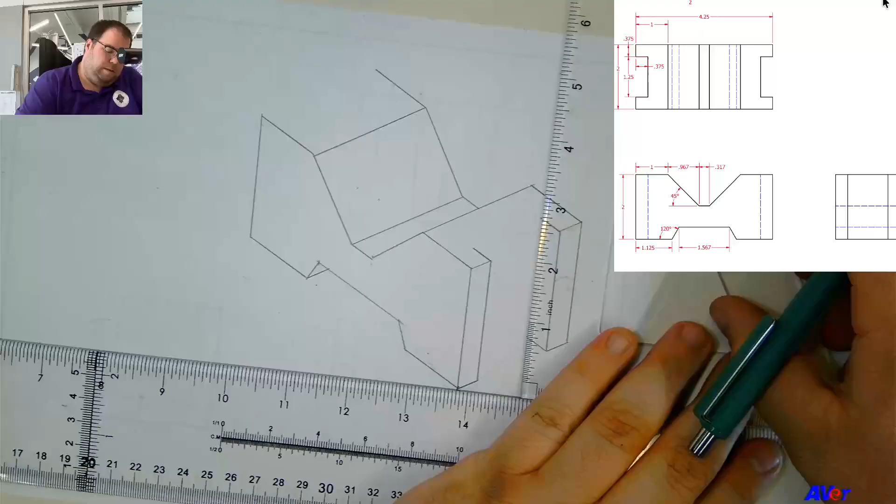And all we have to do is connect these. To do this part anyway. Flip my triangle over here. Connect that. And then down here, connect into the corner.

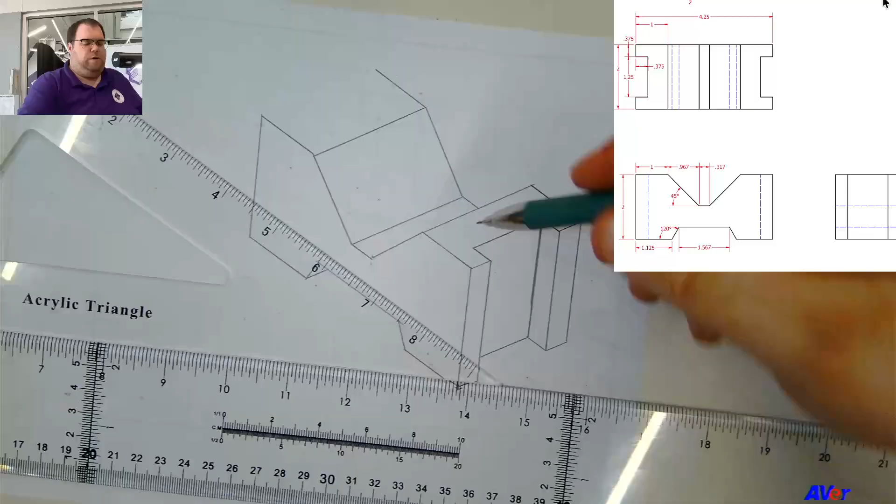So there's a couple ways you can transfer to finish up the shape over here. I'm going to use these lines here that I've already drawn, so I don't have to do any weird flipping measurements of my triangle. So what I mean is, I'm going to set my 8 1/4 inch mark on the end of this line. I'm going to come over here to 4 inches, which is 4 1/4 away. I'm going to draw a 1, 2, 3/8 of an inch line there.

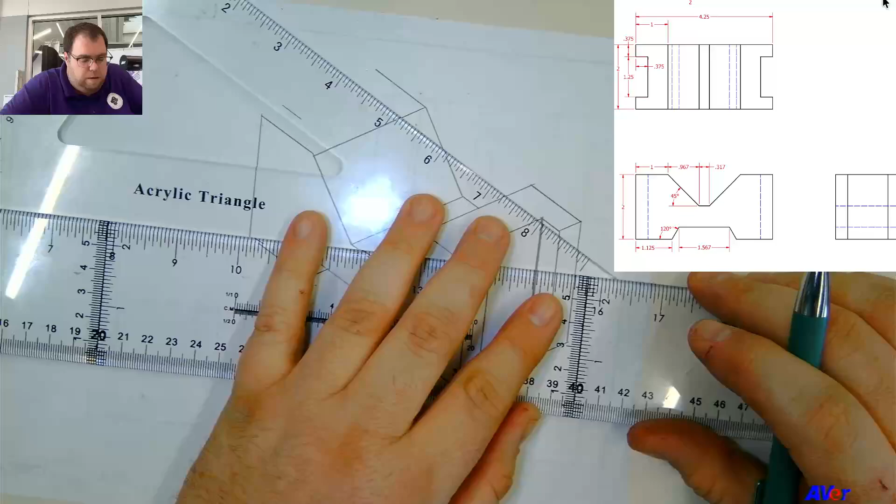I'm going to come up here closer to the top and do the same thing again. 1, 2, 3. So I've lined up there. 4, 1, 2, 3. Did I make that one too short? I didn't. Did I make this one too long? I also didn't. What did I mess up? I'm going from 6 1/4. Ah. I drew that line in the wrong place. 3.

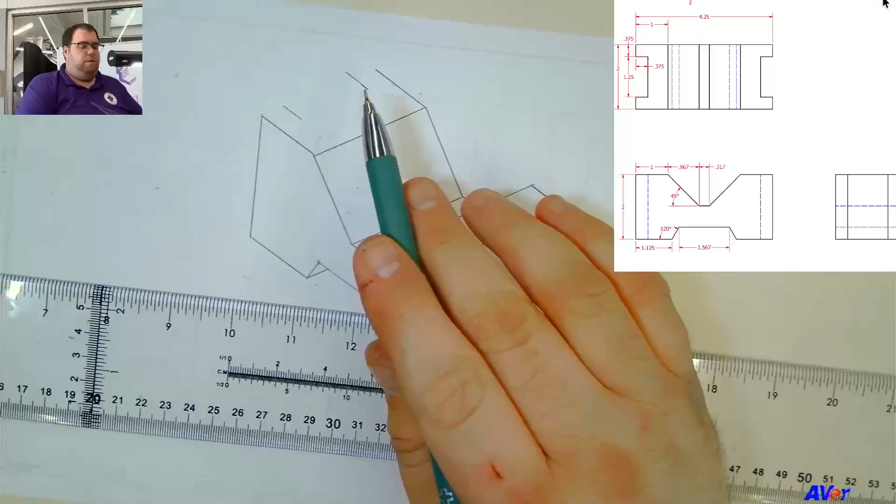Okay, so I drew this line too long. It's not a big deal though. I can correct it without needing to do any super measuring or anything. I'm going to flip my triangle so that I have a nice edge to work with. I'm going to bump up to that and connect that line. And connect those lines. So you can see there I went about 1/8 of an inch too far. And then the very last line we have to do after that is just this corner down until it touches the rest of the shape.